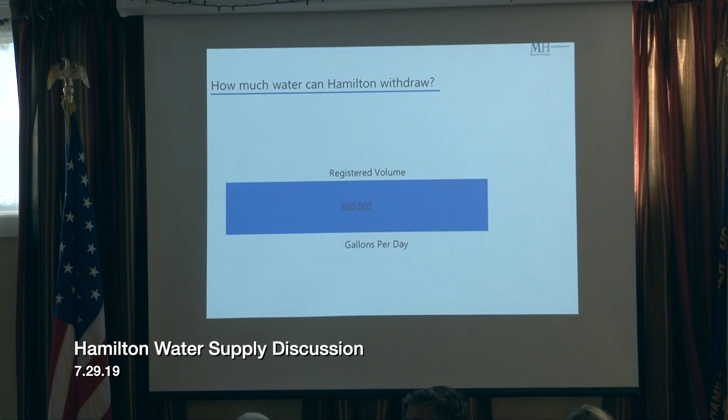The purpose of registering that with the DEP was so that amount of withdrawal would be grandfathered from regulations. So it's supposed to be understood that the town could continue to exercise its rights to withdraw the 920,000 gallons a day without interference from the department.

At the time, the department's policy was to encourage towns to ask for a permit on top of that so they could secure additional water beyond what they were withdrawing in the 1980s to accommodate future growth. So the original permit that Hamilton got was for water that it didn't really need, but it allowed water to be held in reserve so it could accommodate future growth. The original permit stepped it up so that every 5 years, more water would be allowed under its permit.

Back around 2000, DEP changed its mind about that and decided it didn't really like giving out those permits, and they started to ratchet back. One of the things DEP did was to strongly encourage the town of Hamilton to share some of its permitted volume with the town of Wenham.

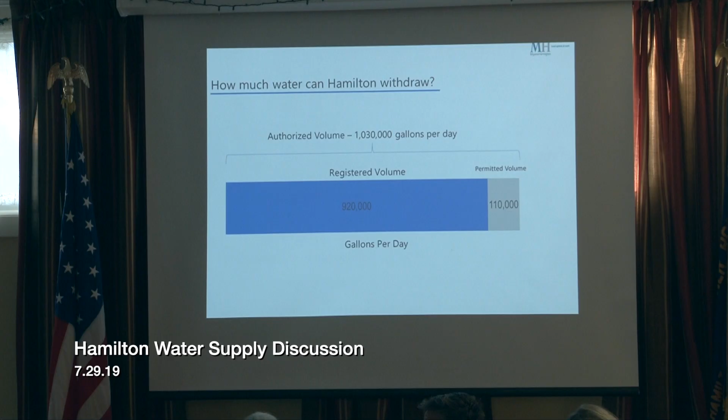So, next slide please. This is the good news slide.

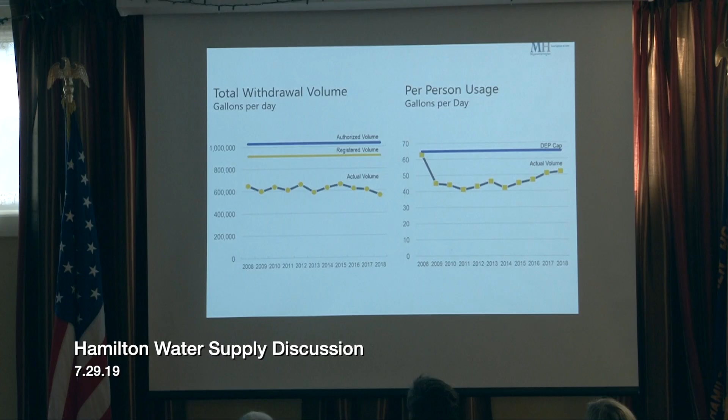So if you look at the next slide, we have in our permit, and many permits have the same provision, that says your water supply system needs to be able to account for at least 90% of all the water it withdraws. So it ought to appear in somebody's meter somewhere that the water that came out of the ground actually went to a customer, and only 10% can be unaccounted for. Generally, unaccounted for water involves things like leaks in the system, where water is leaking out of a pipe somewhere, or other kinds of special things that may have happened.

The water department, I'm sure, is quite vigilant in looking for ways to account for the water that it withdraws, and we've gotten better in the last couple of years at getting close to the cap. There are probably additional things, and I'm sure we'll hear about what can be done there.

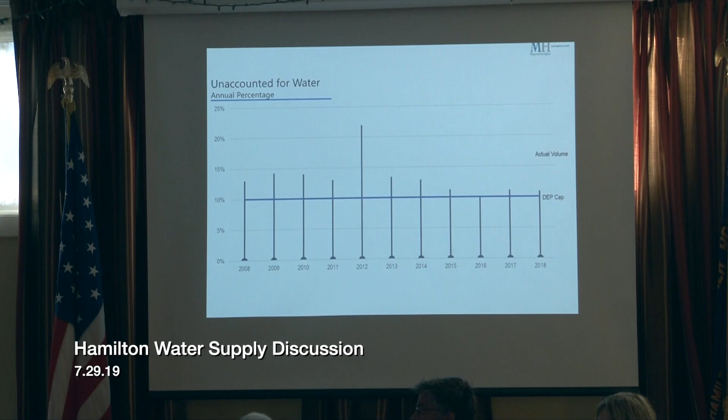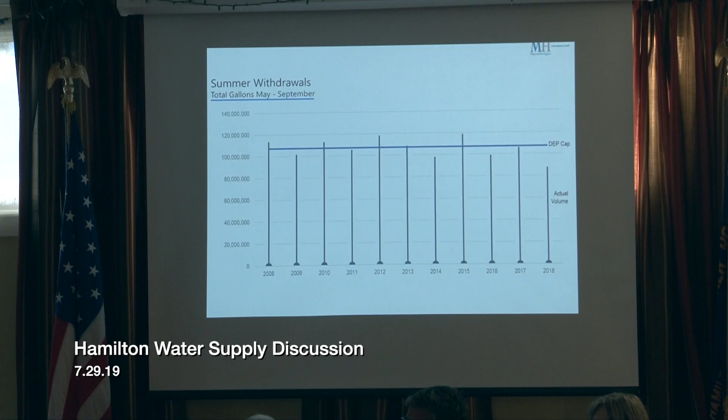But the key thing is that if our summer withdrawal is going to peak, and it's going to peak in July, you're already halfway through the period when you might otherwise be able to do something about your total summer withdrawals.

Now, the key thing that we have going for us or against us is the so-called water bans. I'm sure you're familiar with the fact that every summer the DPW imposes a restriction on the use of outside watering. This is actually something else that's required by our permit. It's not something that we do because we think it's necessarily going to result in better compliance with our permit, but it's something that DEP does indeed require.

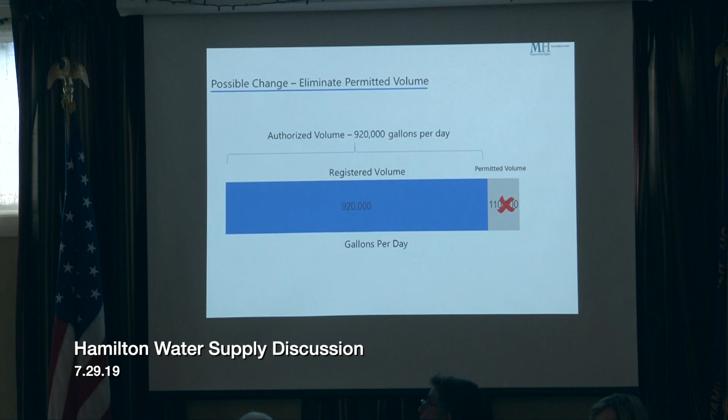The two principal ones are that we would have to demonstrate that we have looked at all the alternatives that might possibly be available to the town, and concluded that this 110,000 that's in our existing permit is the best alternative. And then the other thing we would have to demonstrate is that we have taken appropriate steps to minimize the impact of that withdrawal. So they've made the barrier to keeping our existing permit volume reasonably high.

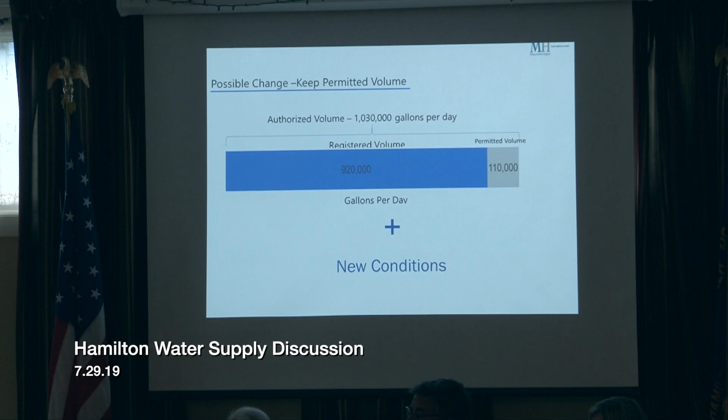That's something the board is going to have to make a decision about at some time in the next few months as we get into the serious nitty-gritty of permitting. So that, in a nutshell, is the permit situation that we have today.

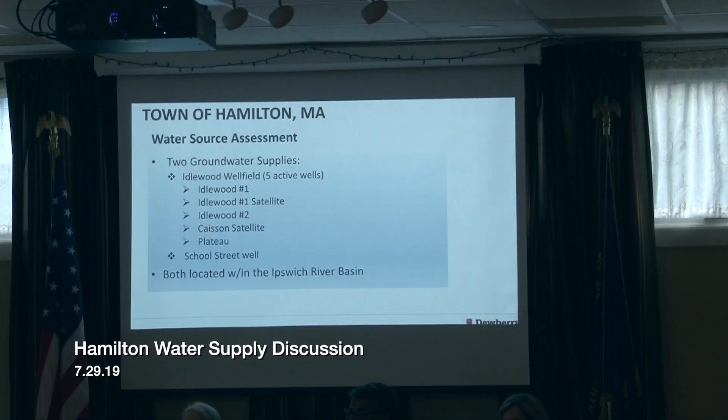Okay, thank you, Tim. Hello, good evening. My name is Peter Calderazzo, and I'm with Dewberry Engineers. I've been working with Tim and the treatment staff for the last 2.5 years to address some of the operation issues that Tim had mentioned. You need to talk in the mic. Oh, I'm sorry, can you hear me now?

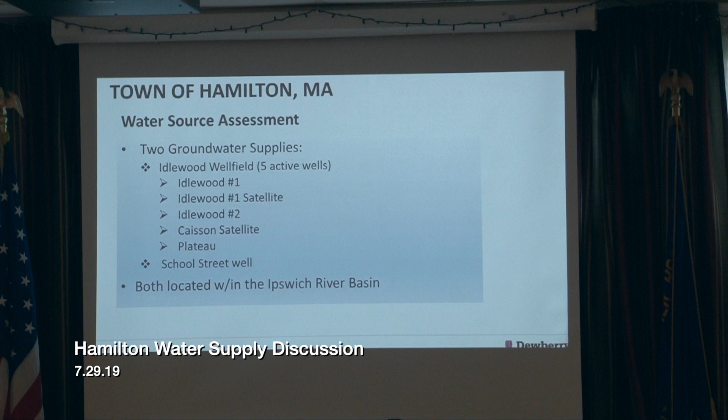Okay, so I'll basically go over this, keep it short so we can leave time for questions, since I know that's probably on everybody's mind. We'll touch a little bit on what Ray had mentioned, and then get into some of the operational issues. This is a continuation of what Ray had started.

As Ray mentioned, the town of Hamilton has two groundwater supplies. One is the Idlewood well field, which currently has 5 active wells that are used at the plant. The other is the School Street well, located in a different part of town. Both are located in the Ipswich River Basin.

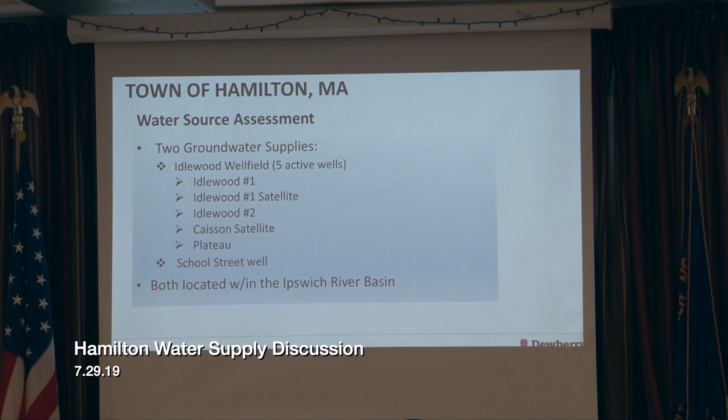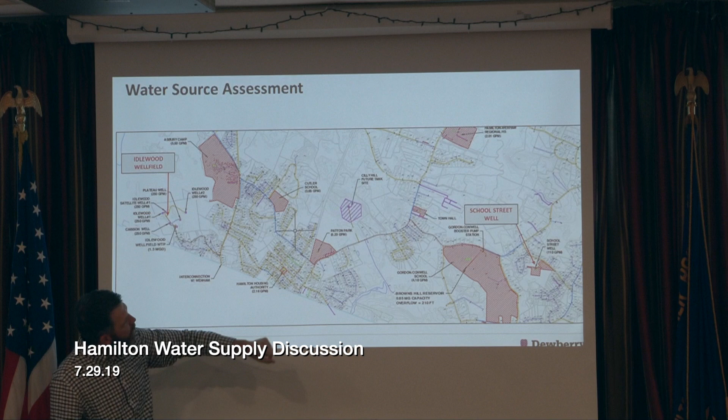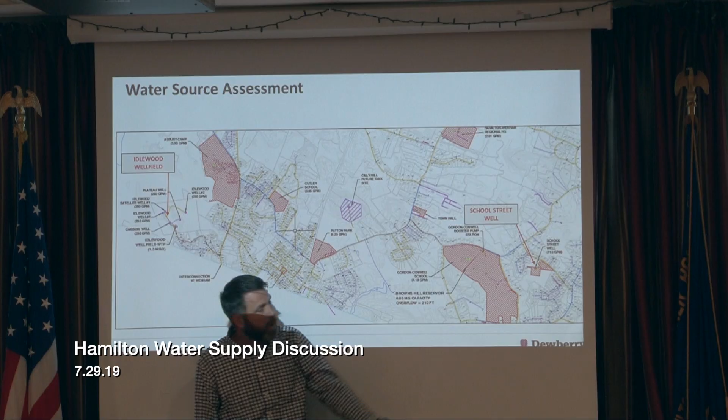This next slide gives an overview of the water system, showing where the wells are located in relation to each other. The Idlewood well field is on the left side, and School Street is not too far from here. The well field is over in the Pleasant Pond area, downtown, and the School Street well is almost right across the street from where we are. Our tank is up on Browns Hill, at the Gordon-Conwell Seminary.

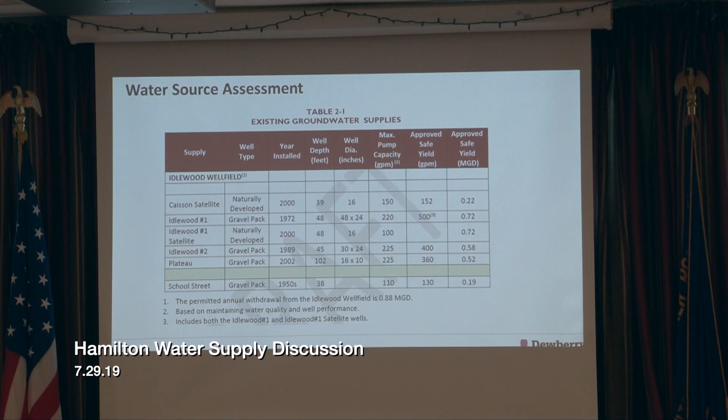So, next slide - just a little more on what Ray had said. The Idlewood wells have an approved safe yield of 0.88. The current production rate of the well field is about 1.3, so they could actually pump up to 1.3. That provides some flexibility in how the wells are operated, giving operators a chance to let some of the wells relax a little bit.

As Tim mentioned, we just completed some recent upgrades to the treatment plant - we'll get into that more in the operations part. Right now the plant pre-oxidizes with sodium hypochlorite, removes iron and manganese through 4 Filtronics pressure filters, post-filter disinfects with sodium hypochlorite, fluoridates with sodium fluoride, and provides corrosion control with a poly-ortho-phosphate blend.

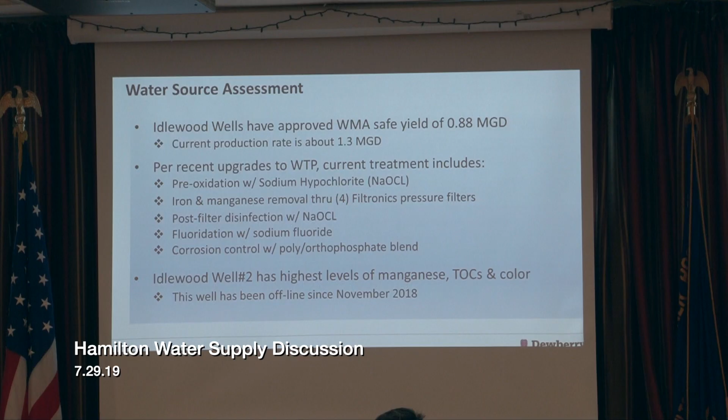Something to note, from working through the system the last couple of years and going through some of the issues - Idlewood well number 2 has, in terms of water quality, the worst water quality in the well field. It has elevated levels of manganese, total organic carbons, and color. That well has been offline since November 2018, which we'll touch on a little bit regarding some issues we had in the water system.

As I said before, the School Street well has an approved safe yield of 0.19 mgd. The current production rate of the well is about 0.16, so it pumps below the approved yield and never really gets close to it, as Ray mentioned. The School Street well is a pretty good source, doesn't require much treatment besides chemical - right now it's treated with potassium hydroxide for pH adjustment, disinfection with sodium hypochlorite, fluoridation with sodium fluoride, and corrosion control with the same chemical used at the Idlewood plant. School Street has very good water quality, with very low iron, manganese, and TOCs. Unfortunately it doesn't provide as much volume as the Idlewood well field, but it is a good source.

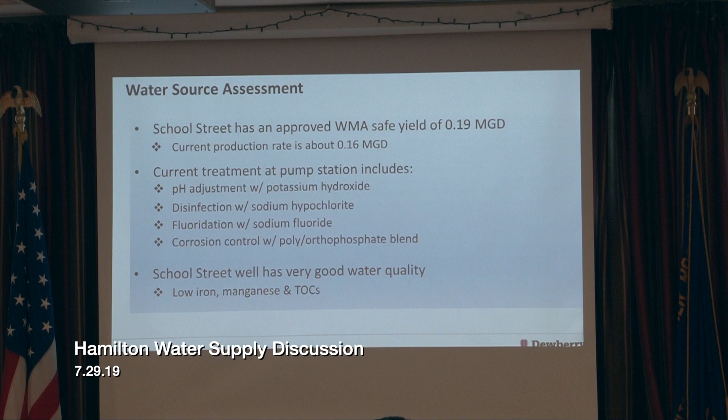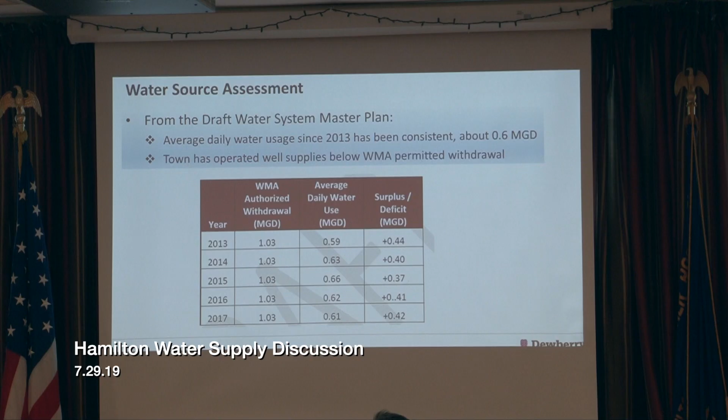As Ray showed in one of his slides, over the last 10 years or so, the town has not had to pump the whole permit. They've been under the authorized withdrawal for the last 10 years, and this is a snapshot of the last 5 years. The permitted withdrawal was 1.03, and over the last 5 years or so, the town's used on average about 0.6 MGD. So there's always been a surplus in the permit to pull from, which is good.

As part of the draft water master plan, we looked at whether the well field is going to be sustainable and able to meet the future projections of the town. These tables are taken from the master plan. We estimated future water demands up to the year 2035, looking at past water usage trends, population projections from some state agencies, as well as the U.S. Census, and trends of the town itself.

From that information, we came up with a population projection increase of 3% to the year 2035. Both MISER and MAPC, agencies that look at population projections, have projected a 4 to 6% decline in the population. But that doesn't really account for any available land for growth and development. There are some future developments planned right now, and for future planning, it's really good to have a conservative estimate. So to provide that estimate and allow for some future growth, since there is available land, we projected a 3% increase in population.

You can see from the table on the left, right now there's a population of 8291, so by 2035 we're projecting a population of 8540, which is not a huge increase, but it falls in line with what's been projected by the other agencies.

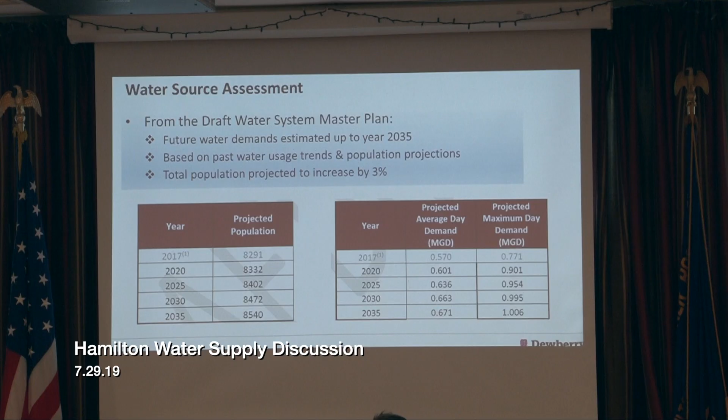The table to the right shows how that affects water usage. In 2017, the average day demand was 0.57 million gallons a day, with a maximum day of 0.771 - that's the high demand that Ray had shown in July. By 2035, we're going to have an average day demand of 0.671 and a projected max demand of just over 1 MGD.

Based on the permitted withdrawal and the pumping capacity of the wells, the well supplies are adequate to meet what we project up to the year 2035. The current production rate of all the wells is 1.47 MGD, which exceeds the future supply needs. But of course, that's assuming the wells are continually running as they are now.

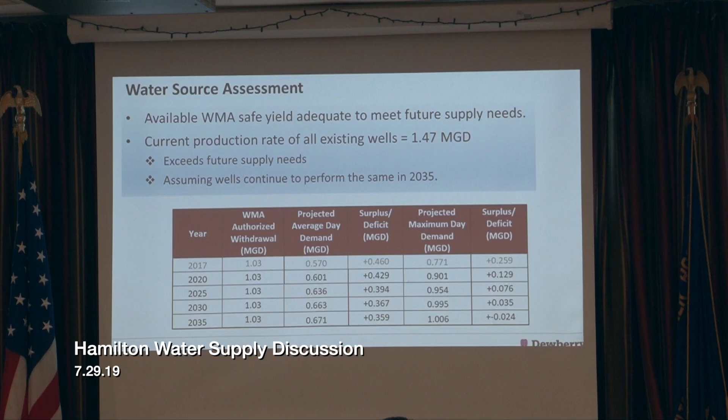Over the years, the wells have lost some production capacity because of water quality issues, and they require pretty frequent maintenance. There have been a couple of satellite wells put in to offset the loss of some of the original wells. So things look good on paper, but that's assuming everything stays as it is, which is probably not going to be the case. That's why we're looking at other alternative sources of supply that could help augment any loss from the wells.

As we said before, Idlewood Well number 2 is the one we're concerned about because it has the highest levels of TOCs and color. It's one of the older wells that was put in, and it's been offline since November 2018. Because of the water quality issues we'll talk about later, there's a concern that use of that well could be limited at least, or discontinued, depending on how we proceed with addressing the water quality issues. If we lost that well, we would lose a production capacity of about 0.32 million gallons per day, which overall would still be enough to meet demands, but it would be tough during high demand periods and would put some strain on the system.

So losing that well could be an issue. We need to kind of address that.

As Ray had said, we're looking at other potential sources of additional supply. Here's just three examples of what we're looking at. We were looking at maybe possibly putting in a new well within the North Coastal Basin. We did some initial testing at the Ford property. It didn't look very promising, so we kind of stopped that. But there's some other sites that we may want to investigate, so we'll talk about that.

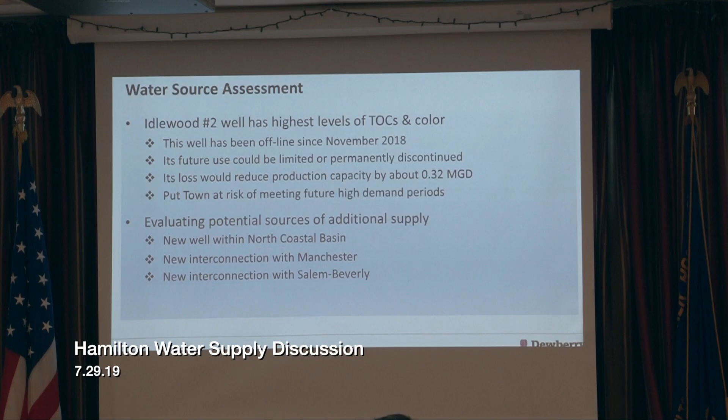We looked at maybe an interconnection with Manchester, possibly, as well as an interconnection with Salem Beverly, to try to pull some supply to augment any loss in wells, and maybe just to provide a source of emergency backup as well. So those are all being looked at now as part of the master plan. Once we finalize that, that'll be submitted to the selectmen, and we can discuss that at that point when we know what direction we're going to head in.

Where is the North Coastal Basin? That's a good question. We'll get that in a second.

Just hold that thought. So in addition to looking at other sources, we were also looking at maybe evaluating what we can do to optimize the use of the Idlewood wells, because right now, if we made an investment into the plant, the plant's running well. Obviously there's some issues we need to address in the future. So with the money we already spent in the well and the fact that the sources are there, it may make sense to try to maximize that use before we look at other sources, other sites, because that's going to be more expensive, and obviously it's going to be an issue in terms of funding.

So some of the things we're looking at to maximize the plant use and the well field use is to add a TOC pretreatment system at the plant to help address some of the water quality issues that have been ongoing. Also adding a THM aeration removal system in the clear well to help further that along. And also looking at putting in a new satellite well to replace the Idlewood well number 2. The hope is that we could drill a well 1,500 feet away from the existing well and find a spot that would provide the water with some better water quality to allow that well field to continue to meet the demands moving forward.

So I understand we're going to take some questions and answers on the water source first before we get into...

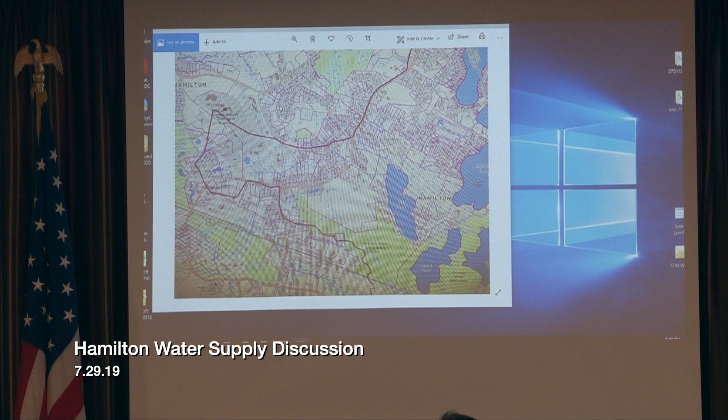So what I was saying before is you have to have a certain size of property, 11 acres. Zone 1 is 11 acres. We don't have that many properties up there that are that size, that are interested parties. There's no town property that I'm aware of. A lot of it is Manchester's watershed, so we have to be mindful of that. I believe all of that watershed, their source is Gravelly Pond where their treatment facility is.

So there is a piece of North Coastal in Hamilton, but there's only certain specific locations where we may be able to have a production well. That's why we haven't been drilling up there that much, just because there's not as much opportunity in that basin. We have drilled in the past. I think we did some drilling on Tobacco Beach. That didn't come back positive either.

So we're always looking for sources. The North Coastal is a good supply of water. It may be something that Peter said earlier - we may look into the opportunity to tie into Manchester, if that's a viable option, a long-term solution. But drilling our own well out there and actually having it produce and pipe directly into the system, we'll have to investigate that a little further, but it doesn't seem like there's that many opportunities out there.

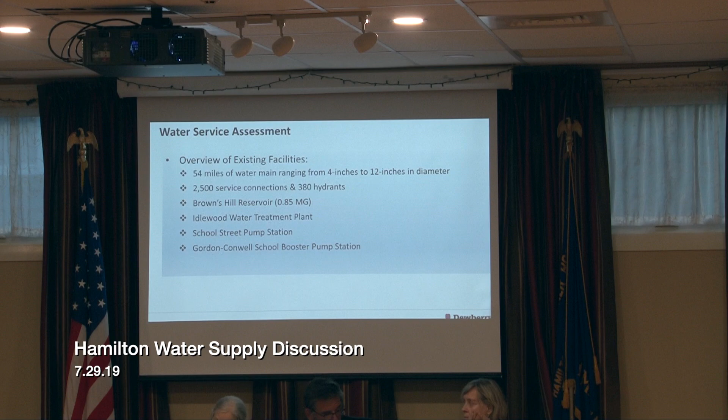So we're going to move on, like Jeff said, to our distribution, treatment, and storage. Again, we have a draft master plan that will answer a lot of these questions. It also provides long-term and short-term solutions to some of these infrastructure improvements, and has some estimated costs associated with that for capital planning. We're going to turn this over to Peter to go through this. Any technical questions, we do have our operator in-house with treatment questions, so feel free to ask afterwards. This is a pretty good quick rundown of how our system works.

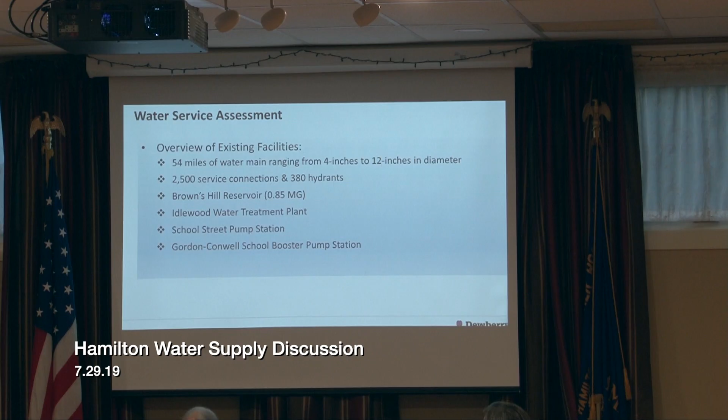Okay, thank you, Tim. I'll keep it brief. Anybody ready for a break? 10-minute coffee break, bathroom break? Nothing? Maybe a stretch. Okay, so I'll just quickly go over the facilities. A lot of this is from the master plan, and then we'll go over the plan upgrades and some of the issues we had recently that I'm sure people want to hear about. So, anyway, overview of the existing facilities in the water system.

So as Tim mentioned, your system includes about 54 miles of water main, ranging from 4 inches to 12 inches in size, 2,500 service connections, and 380 hydrants. Some of the major components are the Brown's Hill Reservoir, which is an 850,000 gallon storage tank, the Idlewood Water Treatment Plant, the School Street Pump Station, and also a booster pump station that the town manages that serves the Gordon Conwell School.

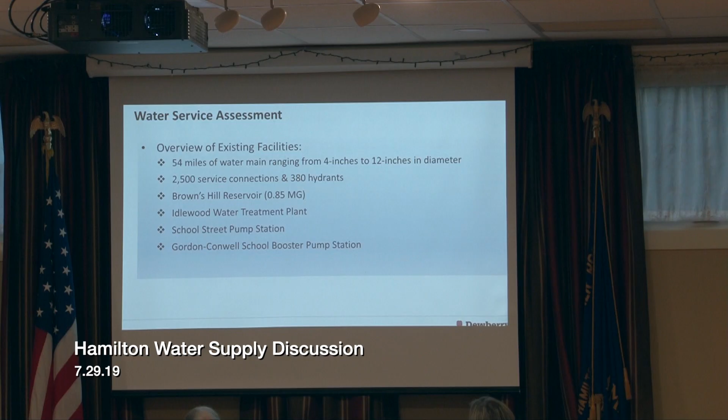So we'll talk about the Idlewood Water Plant, which is the major facility that the town manages and operates. I'll give a quick overview of how the plant came to be, and some of the issues that happened to the plant over the years.

I'm sure people have heard this already, but the original plant was constructed in 2000 and was based on a certain filter media made by Filtronics. The plant was designed to remove iron and manganese, and it had a rated capacity of 1.3 million gallons per day. The plant at that time used chlorine as a pre-oxidant, which is required with that type of media.

This is all from information that I gathered — I wasn't here, obviously, in 2008. But in 2008, we understand issues came up related to media loss, and there were some TTHM formations in the system that were occurring, elevated a little higher than they were in the past.

So to address those issues, in 2010, the filters were converted to what they call a green sand media — basically just swapped out the media from the original design and replaced it with green sand. There was really no... and they also changed out the existing chlorine system with a potassium permanganate system as a pre-oxidant.

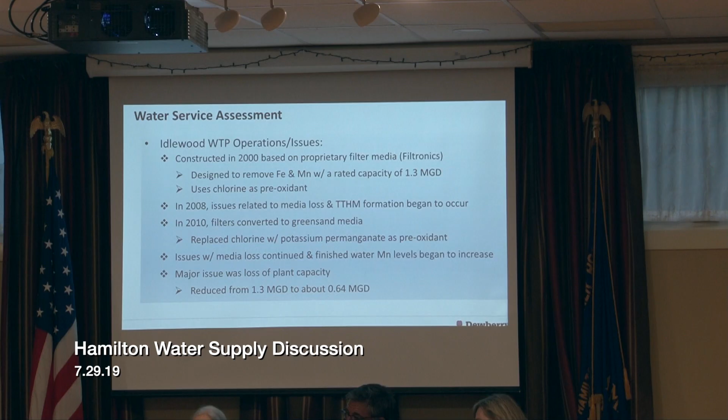Next slide. So in 2017, we came aboard with Tim and Dave and the rest of the staff to evaluate the plant and see what we could do to address some of the issues, with the main goal really to improve the plant capacity as well as the manganese removal, and also to mitigate any further TTHM formation.

As I said before, the plant was really operating at half capacity — actually less than half capacity — which during the summer times meant they were having a very difficult time meeting demands, keeping the tank full for fire protection. So it was a struggle.

So we did an evaluation, and we concluded that the continued use of green sand at the plant was not feasible. It wouldn't meet the demands, and it wouldn't meet the water quality required per our DEP. So we identified two options that the town could consider to address the plant issues.

One was to convert the pressure filters back to the original media, because at that time the media was working in terms of iron and manganese removal, and the plant was running at its capacity. Obviously, there were TTHM issues, which we'll get to in a second.

The other option was to construct a new green sand or membrane filtration facility. So, looking at the two options and given the need to do something quickly, because the plant was hanging on Band-Aids really at that point, we recommended a two-phase approach. We decided to convert the plant back to the original design, get it running to the capacity it needs, and see if that worked and if we could address the TTHM issue.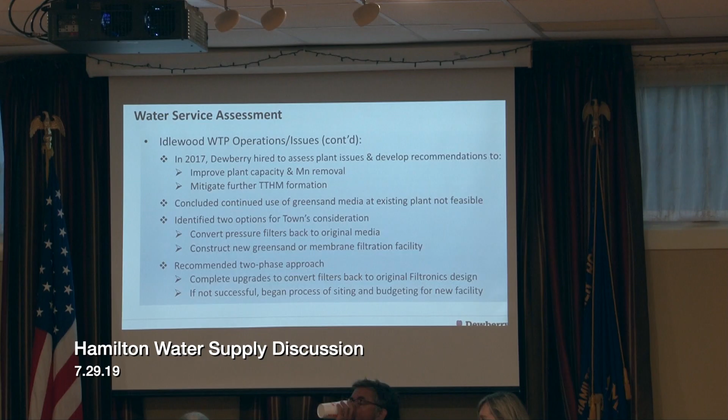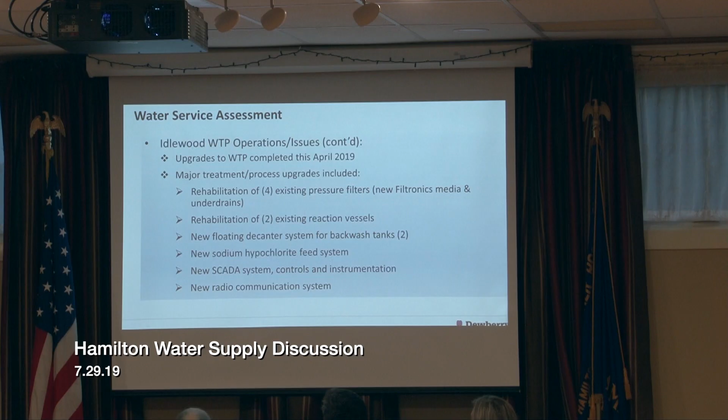So with that, we did upgrades to the plant recently. We basically completed it in April 2019, just did the final pay rec. So this is a list of some of the major upgrades we did to the plant. We converted the existing filters back to the Filtronics. We also replaced all the internal under-drain system for the filter, cleaned it out, and repainted them. We rehabbed two of the existing reaction vessels from the original design. We upgraded some of the backwash tanks and the floating decanter system in both of them. We put in a new sodium hypochlorite feed system to serve the new media in the filters. We also upgraded the SCADA system and provided a new radio communication system.

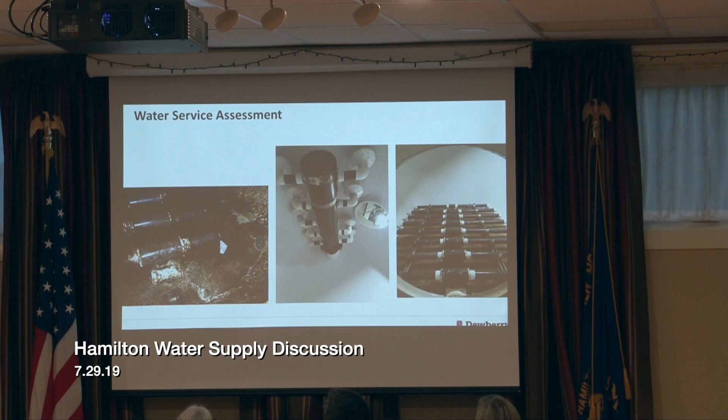Here's just a few photos of some of the work we did at the plant. The photo to the left is the existing filters after we drained them to inspect them. You can see they're a little dirty, but that's to be expected with iron and manganese in the water quality, nothing unusual. The pictures in the middle and the right show the new underdrain installed, the tank all painted and cleaned up.

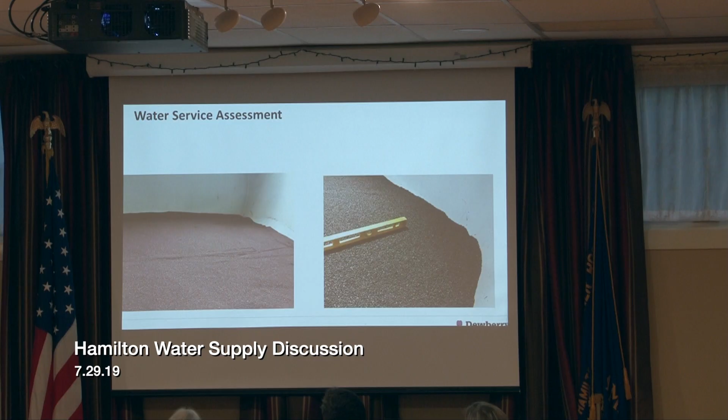Next slide. This is a shot of some of the new media going into one of the filters. The shot to the left is the old greensand media, and the other shot is the new Filtronics media that was put in the filters.

Next slide. These are shots of the backwash tank work that was done. The shot to the left shows the new floating decanter system that was put in. Part of the plant process recycles 10% of the water that's wasted back to the plant to conserve water and minimize backwash disposal. That unit floats in the tank, so when they turn the sludge pumps on, the recycle pump draws water that's pretty clean back to the plant for treatment to save some water. That's what you see in the tanks there. The piping to the right is all new piping we put in, which resulted from an issue we'll get to in a minute with the water quality. That piping was faulty and basically hanging in the tank, allowing a lot of the settled media, not sludge, but the iron and manganese caught in the filters that were backwashed out, to be drawn back into the plant. That was one of the issues that occurred back in November, which we'll get to in a minute.

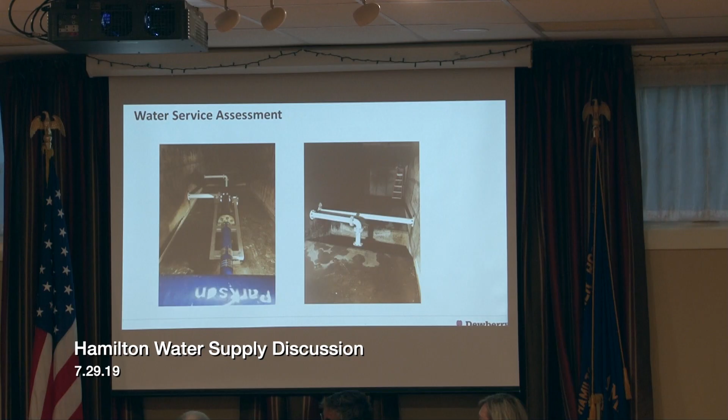So since completing the upgrades, as I mentioned before, the plant is running at 650 to 700 gallons a minute again, which is good. The iron and manganese have consistently removed below the target levels. I think for the last 3-4 months it's been the same reading, which is pretty good. We also noticed that sludge removal from the backwash tanks is required less frequently. In the past they were cleaning the tanks out every 2 weeks; now it's every 4 to 6 weeks, which saves money since that's an operating cost the town had to plan for. Also, because the plant is now back to its original capacity more or less, the town could start to flush the system again. One issue which led to the problem we're going to talk about was that for the last 3 years the town couldn't do a comprehensive flushing program because there wasn't enough water, since the plant just didn't produce enough. So once we got the plant running, the first thing we did was start to flush the system out. That certainly helps the water quality at the tap you drink, and also helps meet the water quality regulations as well.

So that was some of the pluses that we got out of doing the upgrades to the plant. Now we'll talk about the issue we had, I guess.

The town follows what they call the Stage 2 disinfection byproduct rule compliance sampling, which monitors the total trihalomethanes and also the haloacetic acids in the system. Because of the town system and the number of sources they have, they're required to sample 2 sites every 3 months, or quarterly through the year.

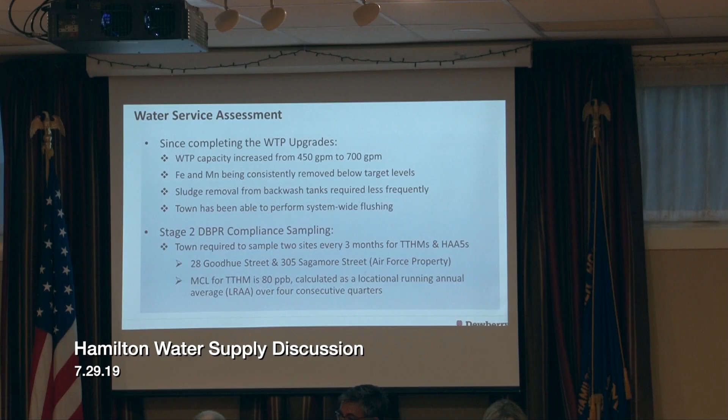So what that means is for 28 Goodhue Street, for quarter 1, 2, 3, 4, they measure THMs, and based on this standard, they take those 4 values and divide by 4, and if that's under 80, then they're in compliance. If it's over 80, they need to look at what's going on. That's how the standard sets the sampling procedure.

So this is just showing the 2 sampling sites. The one to the top left is 28 Goodhue Street, and the one to the right is the Air Force property at 305 Sagamore.

These sites were determined back in Stage 1, which was 2001 or 2002, and they represent the system where the highest age in the system occurs, and the highest THMs that could occur in the system. That was a process they went through over the years, and these sites have been on their sampling schedule since like 2005 or 2006.

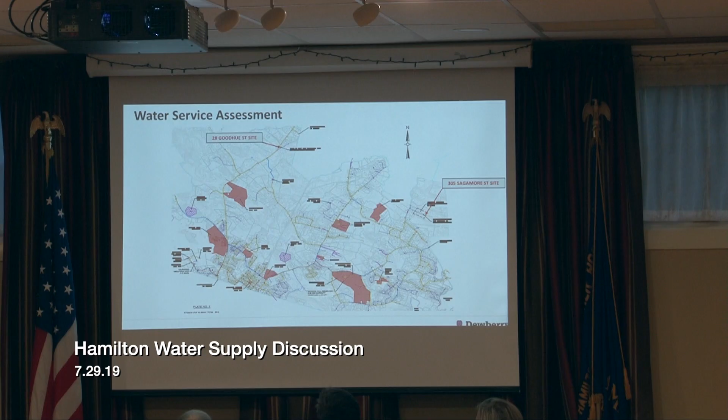So, in November/December 2018, which coincided with their 4th quarter Stage 2 disinfection byproduct rule sampling, there was an elevated THM in the system in November.

And because of that spike, the locational running annual average, or the LRAA as they say, for 28 Goodhue Street was calculated to be 83 parts per billion. So it was over the MCL of 80.

So once that happened, we were looking to see what caused the spike. In going through the plant, because at the time we were in the middle of doing the upgrades, we thought something may be going on with the plant, so let's look and see what's going on. So we did find a couple of things.

One was the faulty piping in the backwash tanks, which I just mentioned. We were in there doing some work and actually cleaning out some of the tanks, and we found out that the piping was pulling apart and allowing a lot of that settled solids to go back to the plant. So we replaced all that piping, so that's all fixed and it's working.

At the same time, we started using Idlewood number 2 well, which hadn't been used in a while. From previous sampling, we know that well had high levels of TOCs, and obviously TOCs with chlorine does produce TTHM. So we thought maybe using that well at that time also contributed to that spike. So we took that well offline, and it's been offline since.

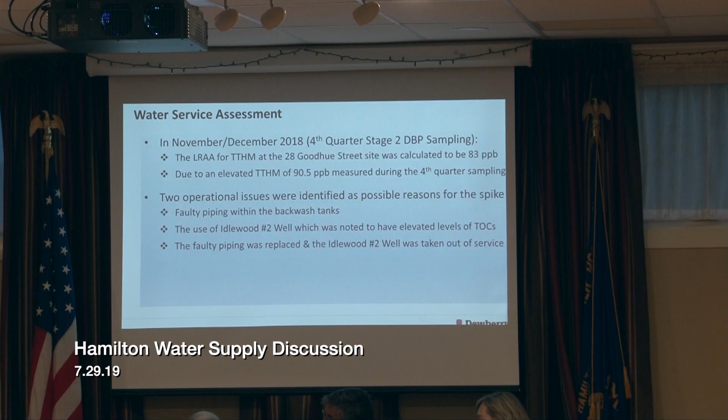In addition to that, we also began a routine flushing of the system, mostly in the area where the THM spike occurred, to try to address the water age and get the water as clean as possible. We also began sampling monthly instead of quarterly, so we could measure the impact of what we're doing, to see if it's working, and if not, what else we need to do. We also began sampling the THMs at the plant, just to see what's coming in, to make sure that what we're doing was effective in reducing the THMs.

The results of the monthly sampling were good. It showed that we reduced the THMs from the spike that occurred in November. The monthly sampling from December to May, the THMs ranged from 61 to 74, so they were below the 80.

Recent THMs in June were actually 52, the best we got to date. I think that's a result of keeping the Idlewood well 2 offline, and also the water department flushing Highland Street at the end of the system as much as possible to keep the water age at a reasonable timeline and keep the system clean. That's been working well, to date anyway.

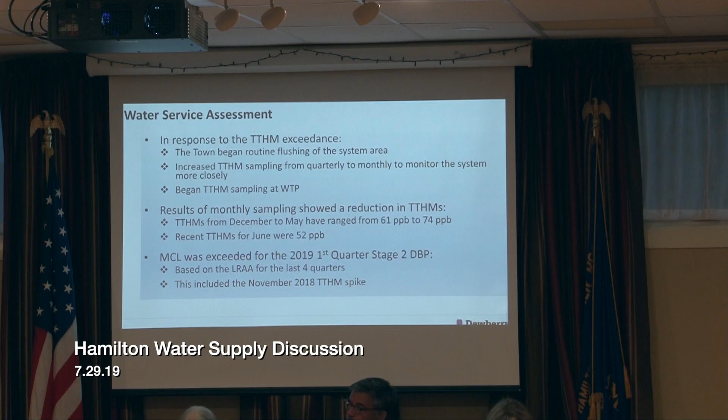However, because of the way TTHMs are calculated, it's on a locational running average. In 2019, the first quarter sampling, even though the previous months the THMs were going down, that spike still carried into the equation. So we had another violation—not because we had an issue in the system like we had in November, but because that issue was carried through. At that point, the town put out a public notice, which is required per the rule, to explain what was going on.

Next slide. So since then, we've been sampling every month, and we've been sending reports to DEP as part of their requirement, so they have this information.

As I said, with the June results, we got 52 parts per billion. Based on our calculations as of right now, which is unofficial because DEP hasn't really given us any feedback on the recent sampling, we calculate the LRAA to be 79, so we should be back in compliance as of June. The table to the right shows the sampling results we've had since November.

In November, we had a spike of 120, and the finished water THM was 90, which was the result of the piping and the use of the well. Then we made those corrections, and every month since we sampled, we got 61, 74, 64, 65. So we've been below the 80, which is good, and the finished water TTHM has also been low.

We just did a quick calculation on the bottom to show that as of right now, the town should be back in compliance. So we're going to continue doing the monthly sampling, continuing with the flushing, and we obviously have some long-term solutions to look at.

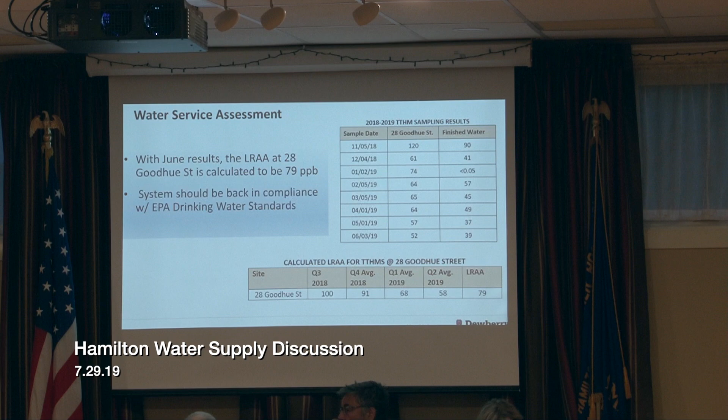As I said before in the previous presentation, we're looking at putting in a TOC removal system at the plant, aerating the clear well to help reduce the THMs. We haven't finalized exactly what we're going to do yet because everything has a cost, so we're going to look at what's the best solution for the town to proceed. But for now, we're going to continue keeping Idlewood Well offline and doing the flushing and monitoring monthly to make sure what we're doing keeps the water quality within the standards.

Just to put things into perspective, I know people are concerned, and rightly so. We put together this table of other communities around Massachusetts, showing their annual THMs and what they deal with. It's not just an issue at Hamilton—a lot of towns are dealing with the same challenges. This is a quick rundown of some towns and cities and what they're dealing with. You can see that THM ranges go from as low as 19 to as high as 79.

Last year the town of Middleton had an exceedance as well. Even Salem Beverly, which has a very sophisticated treatment plant system, also had a high of 124. So it's not uncommon to have these spikes, but as long as the next quarter you get it down and put those actions in place, that's what matters.

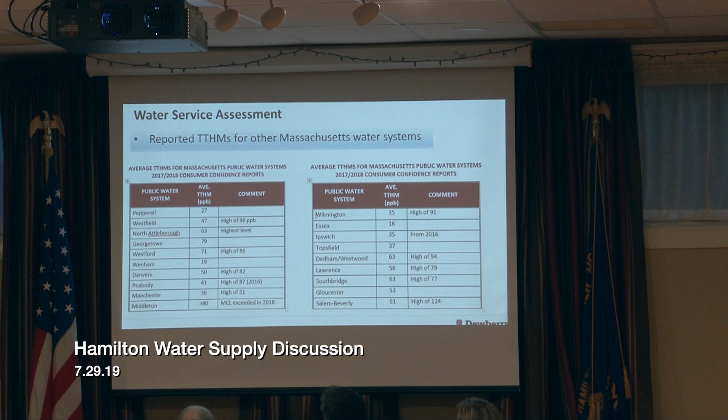Anyway, with that, we'll also take any questions.

Question: are there fines when you're out of compliance? Answer: You get fined if you're out of compliance and you don't follow what DEP mandates you to do, and if you're not doing your due diligence, if you continue to go out of compliance, they will fine you at some point. I don't know exactly what the violation requirements are, but once you go on a violation, you need to notify, and there are certain standards you need to follow, and DEP is involved—you have to coordinate with them. As long as you're doing your due diligence and working in good faith to address the issue, they work with you. But if you don't work with them, obviously there's an issue.

Dave Thompson, 103 Essex, asked two simple questions. Let's assume we want to give up on Idlewood 2 well—did I hear you say we could get a permit for a replacement well as a satellite well or something like that? Yes, we can. So if you want to give up on that because it's not good quality water, we can replace that at that location. Correct. Second question: assume the treatment plant evaporates.

It no longer works, something went wrong.